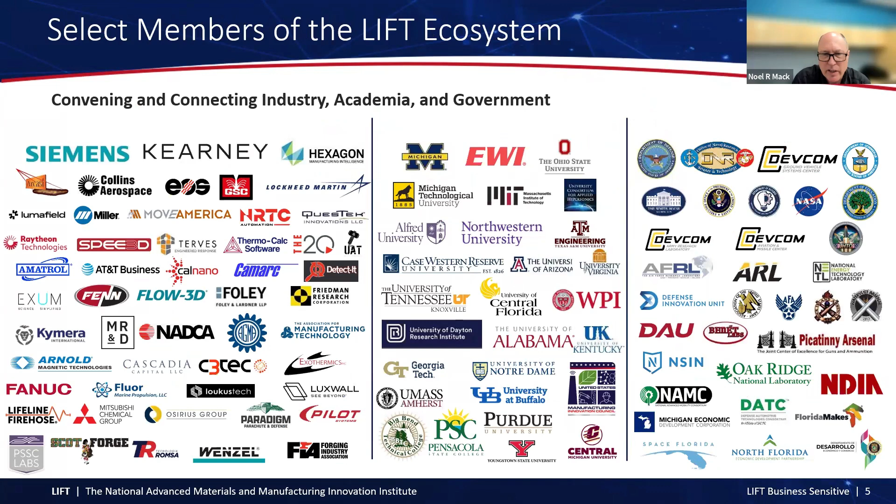So why do we need a National Advanced Materials Manufacturing Innovation Institute? Because literally everything is materials - the room you're in, the car you drove today, everything. It has been studied that an improved materials infrastructure could have a $270 billion positive impact on our US economy. Materials are also of critical importance to the Department of Defense because they not only allow our warfighters to achieve their missions, but better materials can better protect them so they can come back home safely.

Now let's talk about how LIFT is the right organization to work on and solve these materials challenges. As a public-private partnership and accelerator - and it's important that we're an accelerator, not an incubator - we work in this MRL 4 through 7 space. If you look at the manufacturing readiness level space, 1, 2, 3 is really in research and academia, while 8, 9, 10 is mainstream commercial and industrial partners. This gap in the middle, MRL 4 through 7, is often known as the valley of death, connecting good ideas which have legs into commercialization.

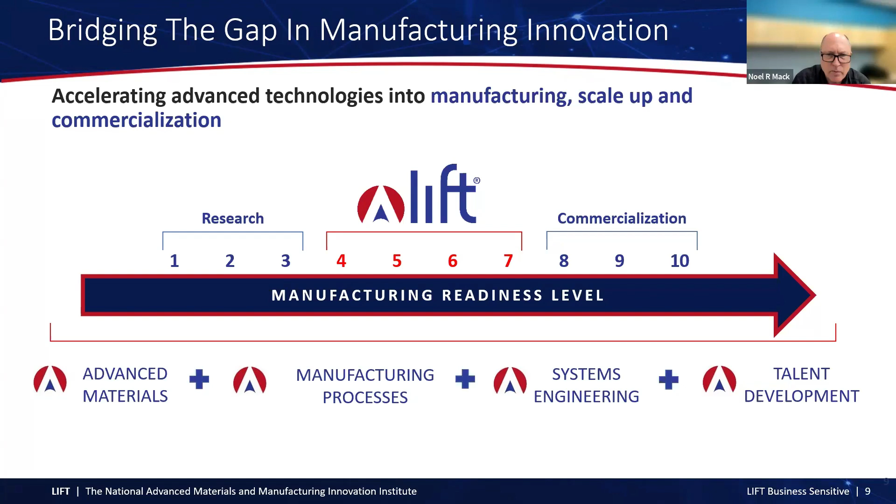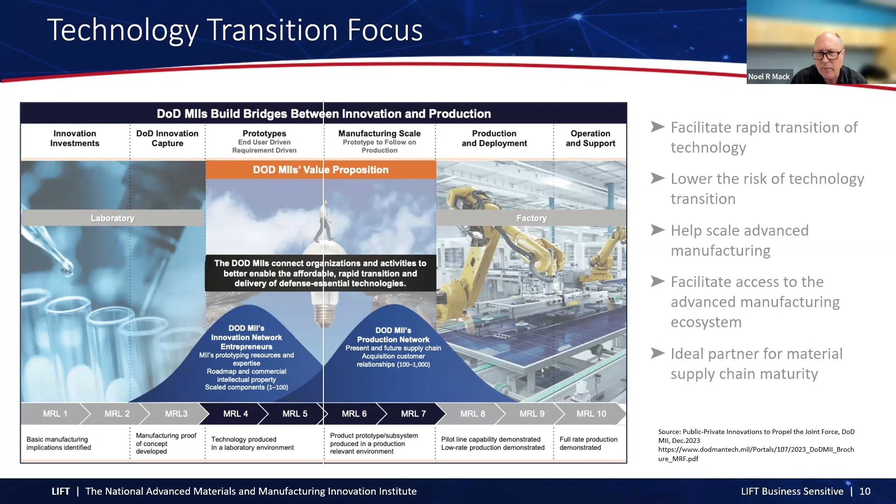As stated in the prior slide, LIFT is the technology accelerator. Thus, we tend to spend our time in this MRL 4 through 7, known as Valley of Death, but we see it differently - we see this as the Sea of Opportunity. This snapshot is the DoD's view of us in those two humps in the middle, from MRL high 3s into early 8s. We work on rapidly transitioning technologies across this space. We lower the risk of technology adoption, scale new advanced materials and manufacturing processes into commercialization. We provide access to an advanced manufacturing sandbox within our facility. This makes us an ideal partner for building a resilient materials supply chain.

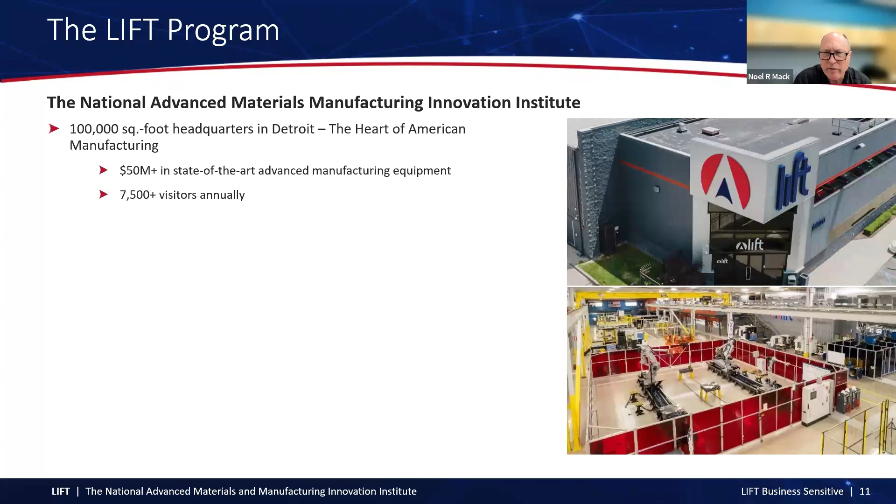As the National Advanced Materials Manufacturing Innovation Institute, we operate a 100,000 square foot facility at our headquarters here in downtown Detroit with over $50 million of manufacturing equipment. This facility sets us apart from other MIIs in that we are not limited to our members' manufacturing capabilities - we stand up our own equipment to study and solve today's materials challenges.

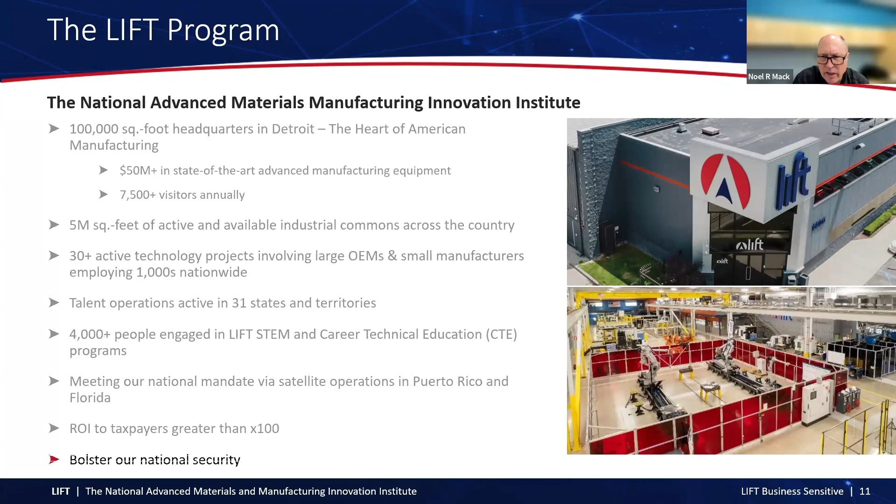We manage and execute roughly 30 tech projects at any given time, involving large OEMs and small manufacturers along the way, and with our government partners. We create and distribute talent development programs to over 30 states nationally, allowing returning servicemen and women to quickly and smoothly re-enter the workforce. And we're growing, expanding operations into Puerto Rico and shortly into Florida. All of this drives a significant ROI back to the taxpayer, but most importantly and proudly, it bolsters our national security.

So we achieve all of this through our technology and talent programs. Our focus today is on a technology program known as Leading Innovations for Tomorrow. This is how we accelerate technologies. There's a rather busy slide, so I'll break it down in the subsequent sections.

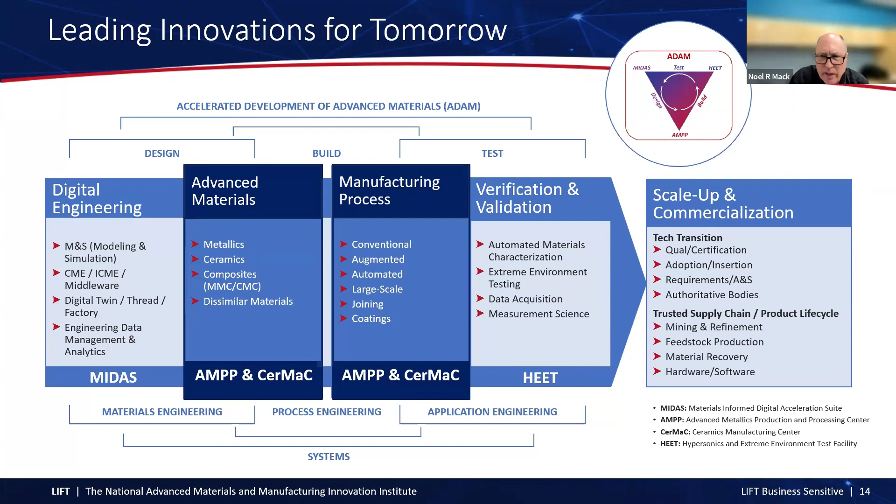These pillars around accelerating technologies start on the left with digital engineering, moving to advanced materials design, coupled with a manufacturing process, to understand that both materials choice and manufacturing process result in a part or system that is fit for purpose. How do we know it's fit for purpose? Through the next pillar, verification and validation, ensuring the digital models, materials choice, and manufacturing processes are correct, and closing the loop with validation. Then we work with our industry partners and the government to scale these technologies up and move towards commercialization.

I'd like to take a few moments to describe our approach to materials development. Material development takes a long time and is costly due to the extensive testing and validation required. We're typically stuck in the build and break model. As a result, new materials are failing to keep pace with more rapid design innovations. Yet new materials hold the key to new and exciting innovations.

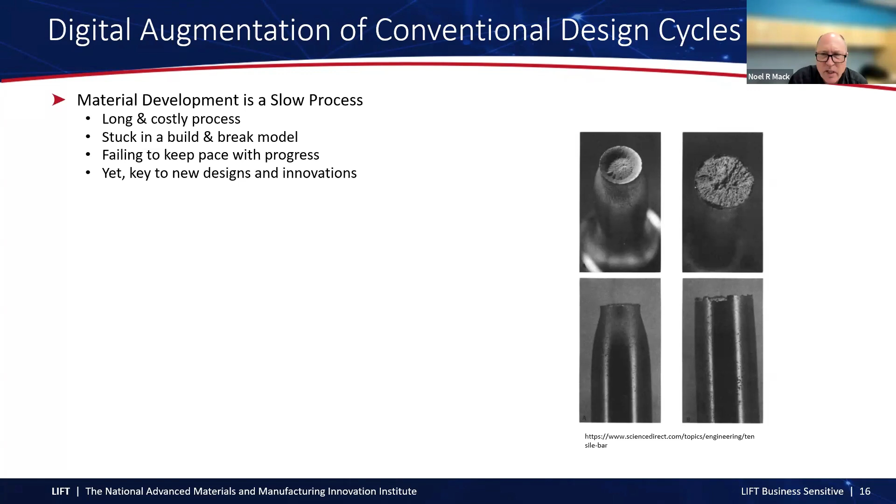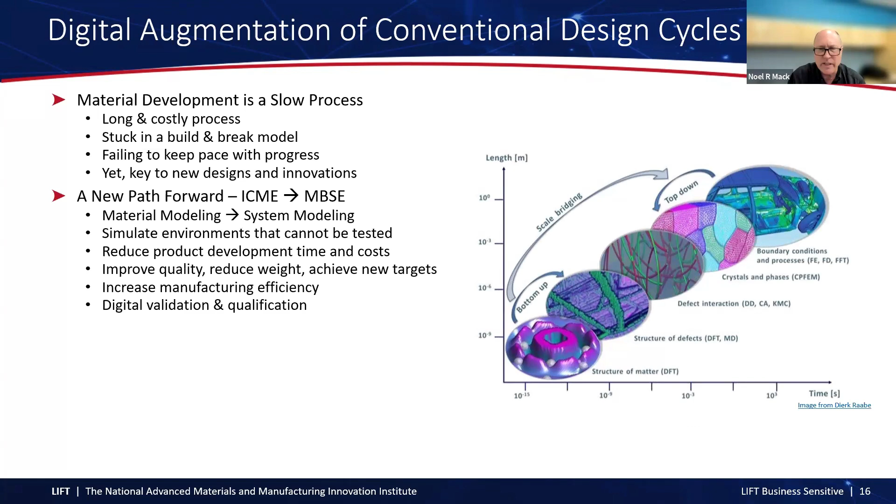There's a path forward: integrating material modeling into systems modeling. This can enable us to break the pattern. Not only can it evaluate environments that cannot be tested, it can also reduce development time and cost, improve quality, and increase manufacturing efficiency. This really yields significant economic and strategic benefit.

By stopping failed programs early and accelerating time to market, we found over 35% acceleration factor. We can increase overall efficiency by over 70%. We can reduce the cost of development and manufacturing, or both. It helps build a robust material supply chain, and the overall economic benefit, we believe, is close to $300 billion annually.

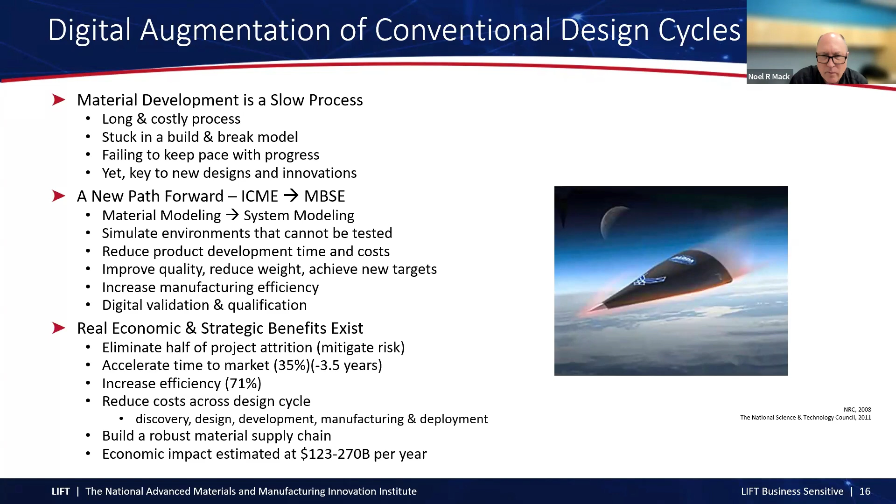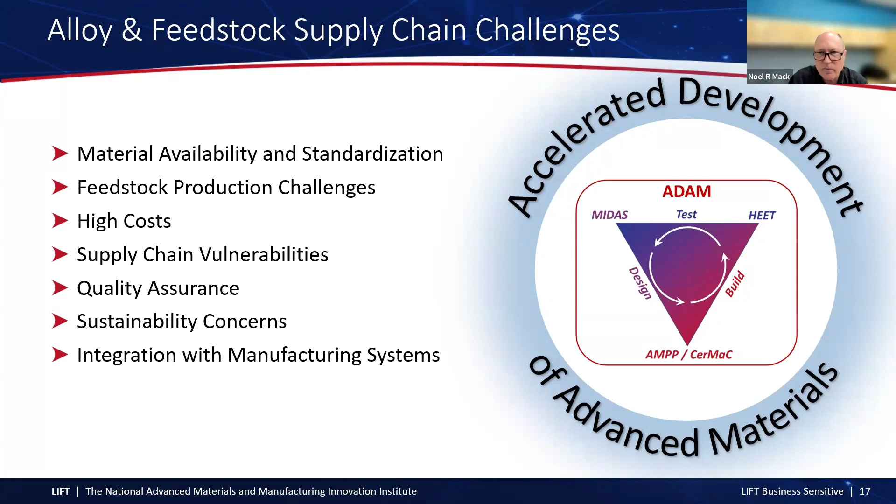As I mentioned, we're strongly focused on material development, particularly in extreme environment applications. We do a lot of independent work in this area to help accelerate the state of the art. We're building out an end-to-end ecosystem to support material development from start to finish. It really rests on three top pillars: design, build, and test. So the objective is to design, build, and test the part, the material, and the process simultaneously. We're very active in digital engineering.

We're also standing up capacity to deliver metal feedstocks to support these new material discoveries, as well as the capability to produce custom ceramics and CMCs. That's the next pillar over. And finally, we're engaged in the development of a new state-of-the-art extreme environment test facility in the state of Michigan. That's the third pillar, our HEET. Again, everything we do is to accelerate technology development so it can move into commercialization.

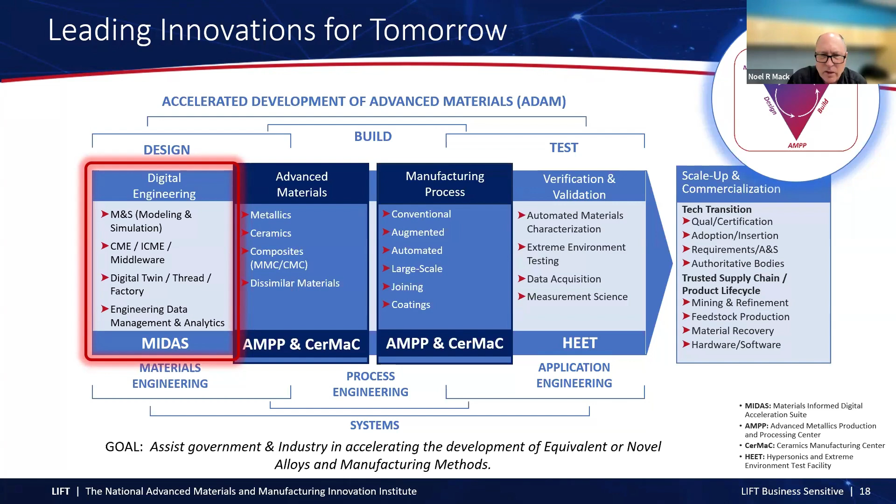So let's talk a bit about what we're doing first in the digital space. I spoke about the significant economic opportunities that await us. What we really need to do here is integrate material modeling with systems modeling. However, there's a bunch of challenges that exist.

Today, we've got discrete silos between materials development, manufacturing processes, and structural applications. In many cases, these are different departments even in most of the companies we work with. As an example, with additive manufacturing, the material and the part being created at the same time are inextricably linked and they influence each other. So it's very difficult to design them in silos.

So by creating this materials-focused, model-based systems engineering approach, we can aggregate knowledge across these silos, really linking the materials and the application together, creating an environment that combines both the digital and the physical.

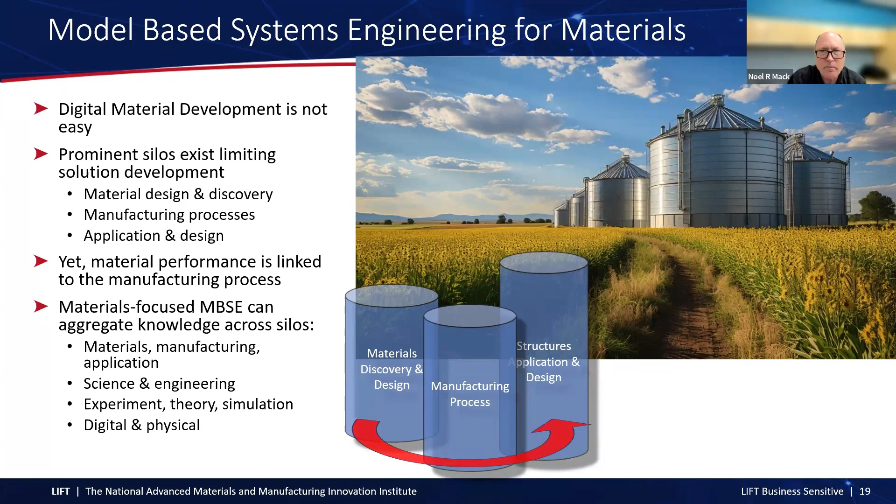So that's a lot to consider. We're talking about linking the atomic to the nano, to the micro, to the macro scale from end to end. Today, there are lots of applications to help you along the way to solve these parts of the process, but there's no singular software in existence that addresses the varied needs of the material community across the full spectrum.

Each does create a digital twin of its respective physical partner. However, there's not much connectivity between these twins. So today, with no common interface linking all these disparate tools, and if there is, oftentimes they don't speak the same language, so spinning the thread still requires manual intervention. Essentially, some codes speak German, some codes speak English, and some might speak Spanish, but we need to do the translation from one to the next. So we're really left with a collection of digital twins and fragments of digital threads that require expert knowledge to navigate and synthesize.

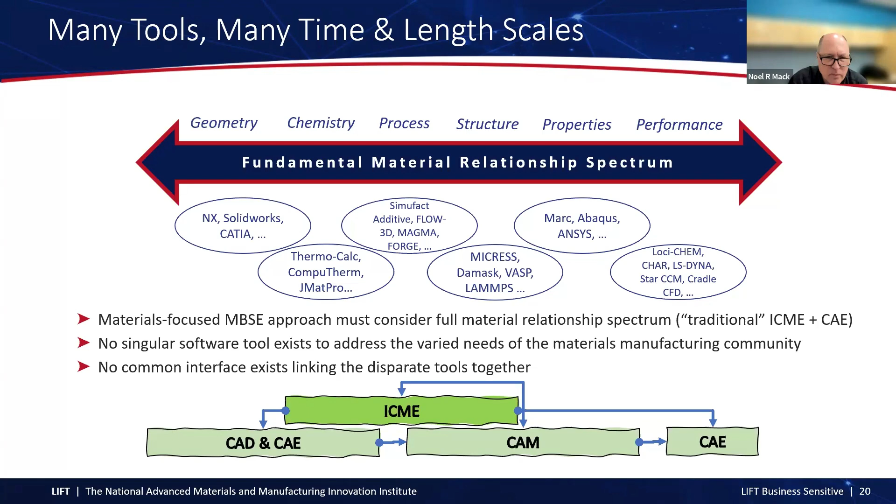So what we know as MIDAS, which is our Materials-Informed Digital Acceleration Suite, is a digital platform that supports both material design and manufacturing process development. It facilitates and automates data translation between the codes, creating a robust digital thread across multiple digital twins. It automates the process, giving rise to accelerated development, and supports a digital validation and qualification strategy.

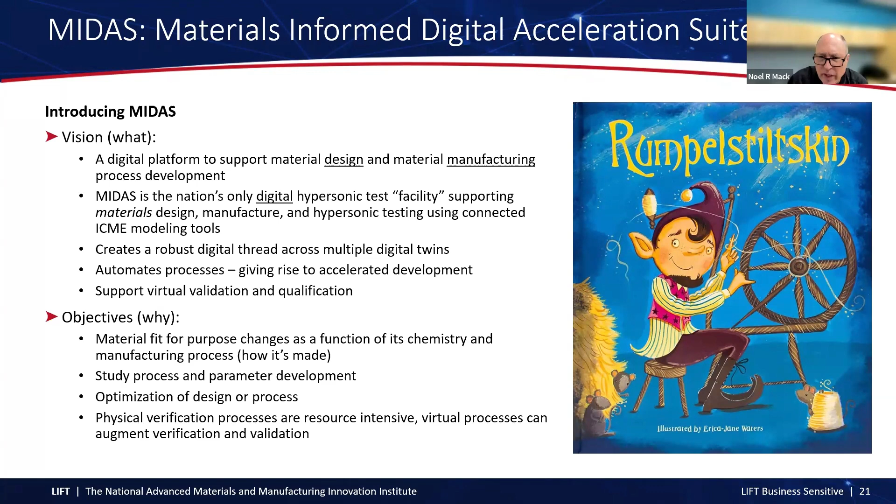So it allows users to understand if the materials are fit for purpose as a function of the chemistry and process. We can study process parameter development and perform optimization of design or process, or both simultaneously, and perform the virtual qualification. You could call us the Rumpelstiltskin of ICME. So we're really spinning the straw into a digital golden thread that connects these disparate systems, allowing one to create tomorrow's next material breakthrough.

So at the same time, once you have a new material, it still requires physical trials and validation. So we also need to accelerate this process. We're currently standing up equipment to manufacture metal additive feedstocks across the full periodic table. We'll then take those materials and, leveraging equipment on our shop floor, produce parts for testing. We're not limiting ourselves to metals only. We are also highly engaged with the next generation ceramics and CMCs and other extreme materials. Similarly, we are not limiting ourselves to additive manufacturing, but supporting a full array of traditional and novel manufacturing methods as well.

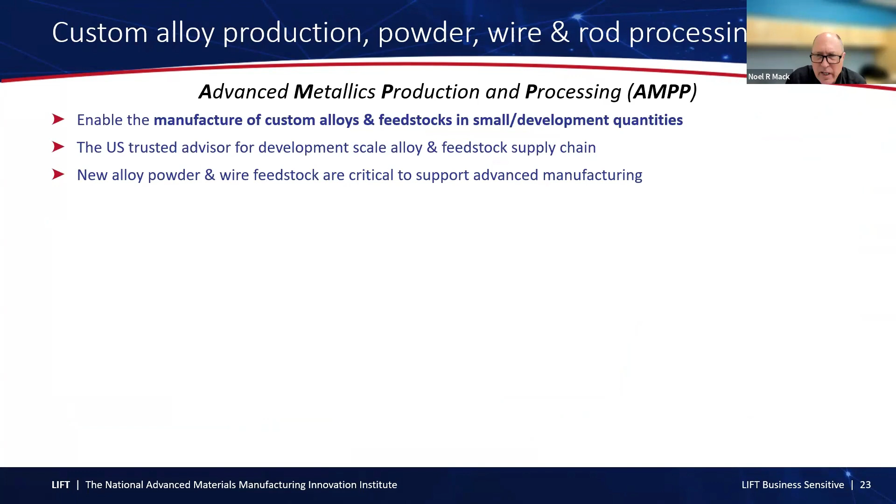So we're focused on technology acceleration. We're focusing on this center and small development scale volumes in novel materials. The Advanced Metallics Production and Processing Center will be capable of producing novel alloys across the periodic table, from steels to refractories, and will support the broadest AM process from powder bed fusion to DED, friction stir, welding, cold spray, and others.

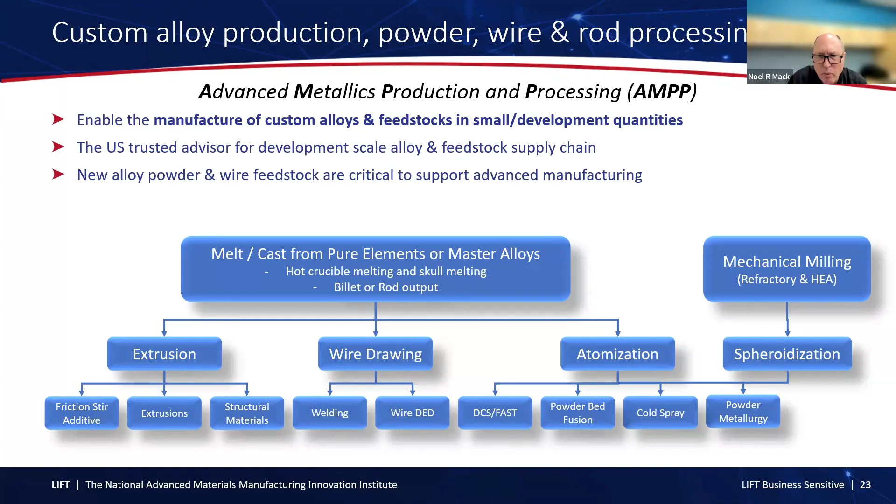We start at the beginning by melting alloys to your specs or designs of our own recipes, and then post-process these materials to deliver high-quality feedstocks in powder, wire, and rod form. This should support the broadest of AM processes.

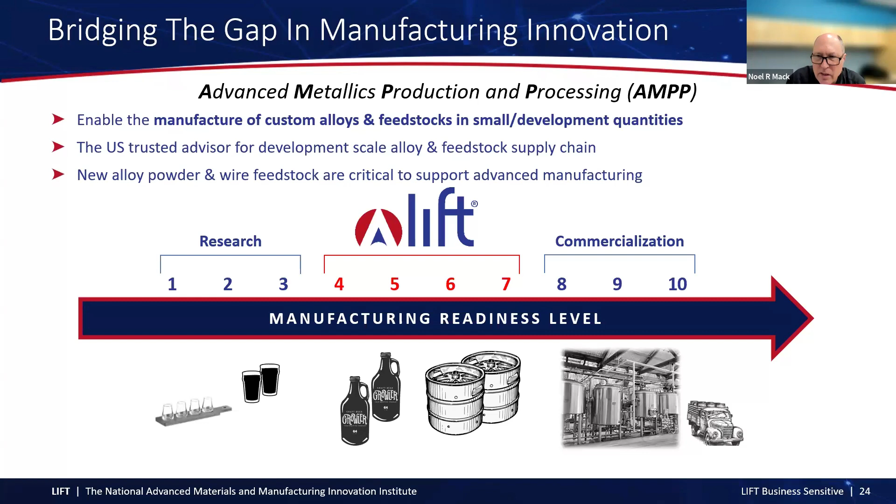So, putting this in a different context, put this into a brewing context. Academia, research organizations working on flights and pint-sized batches. We're in the growler and keg quantity, and then industries producing truckloads. This capability fills the void between the two quite capable existing bookends and helps speed development of novel materials.

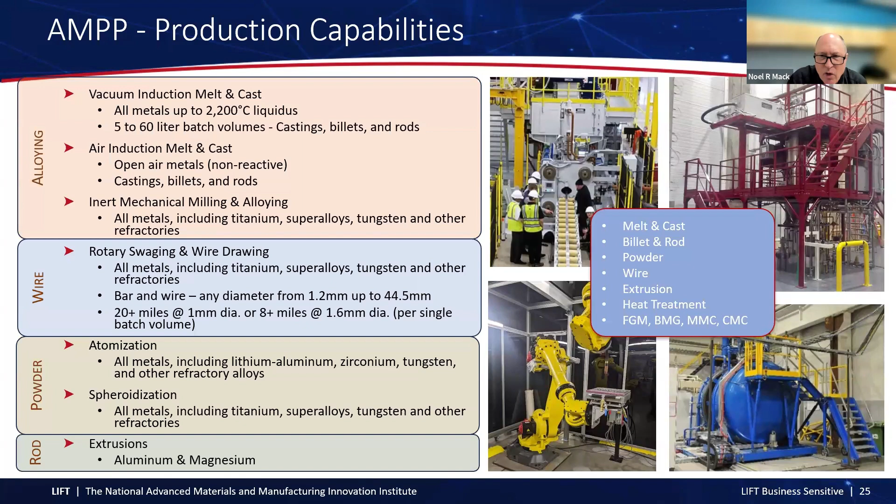So a couple of words on each of these capabilities. Some of the specs on the melt cast capability. So this really goes from the reactives, the aluminums, titaniums, and zirconiums through the light elements, aluminums and magnesiums, through to the ferrous and other materials. We can run in two separate modes, either a hybrid hot crucible or an induction cold crucible mode with roughly 28 to 30 liter batches. We clearly talk about the volume because if we're working in the lights and the brights up to some of the heavier materials, it's more important that we focus on the volume than the mass. But think of 500 pounds of steel is a typical batch size through this capability.

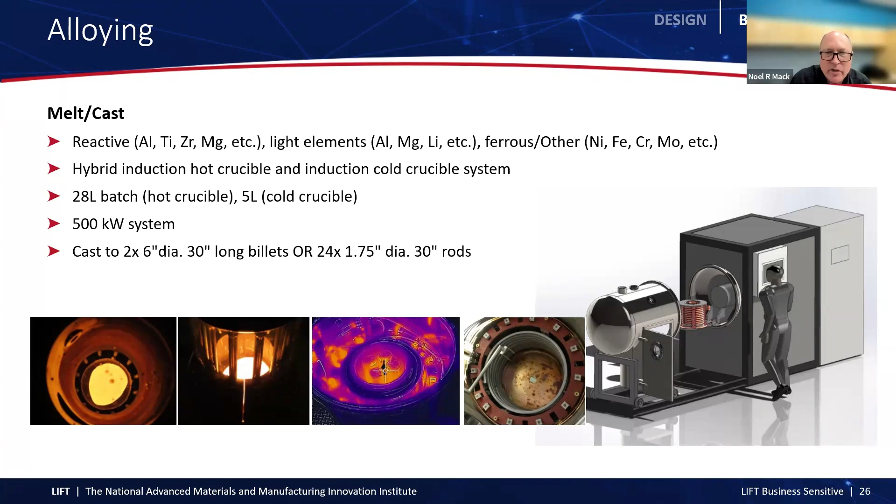On the attritor, here we're really intending this for the refractories that we can't put through the traditional alloying process. This is really crushing the particles together. Think of two different colored Play-Dohs and constantly melding them until they become one.

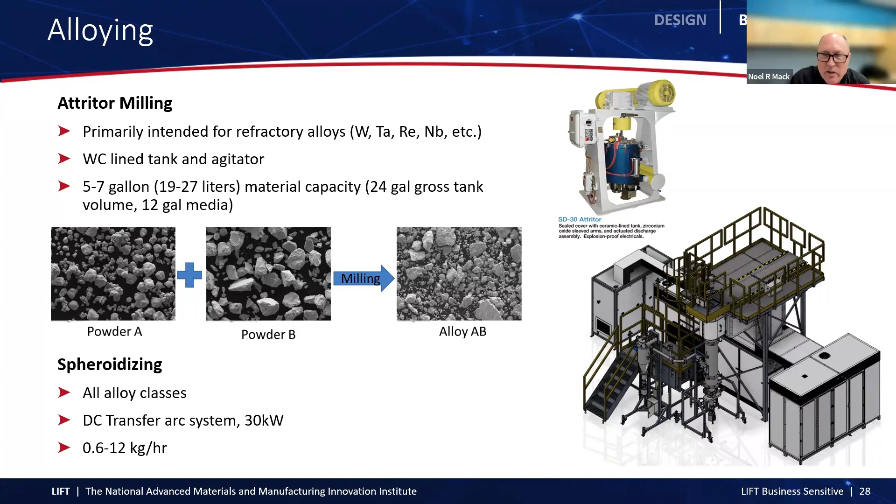Here, the particles that come out look more like cornflakes and need to be, in most cases, spheroidic in nature to flow through downstream processes. So in this case, we'll feed them through the spheroidizer to get spheroidic particles.

On the atomizing side, it can be run in multiple modes, roughly 90 liter capacity for the screw feed or 60 odd for the tube feed. We can also run an induction hot wall crucible for a close-coupled operation, which is for non-reactive materials.

This equipment that you see in the picture stands roughly 26 foot high, so it pretty much fills the high bay to the ceiling.

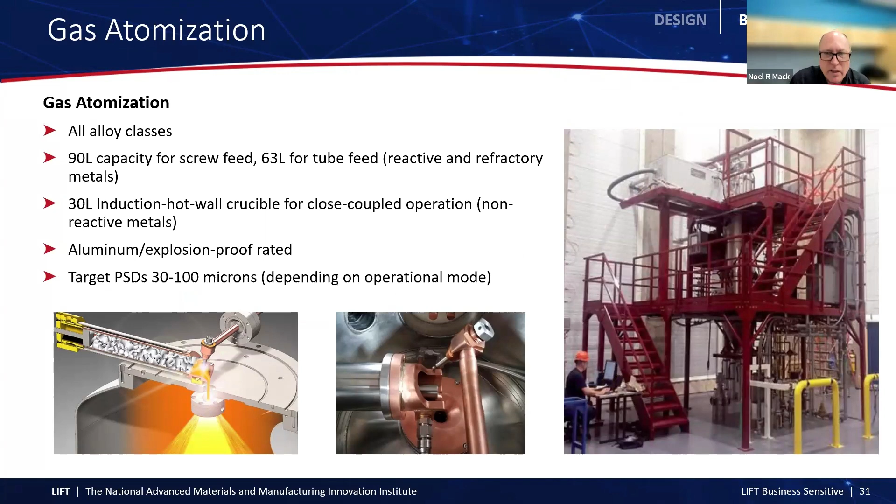On the swaging and wire drawing, we typically start with a roughly 45 millimeter diameter rod. We'll swage that down to roughly 1/2 inch and then run that through traditional bull blocks to as small as 0.6 millimeter diameter wires.

If we think of one rod that has been cast, and we can cast up to 24 rods at a time, one rod that is cast, if we draw that down to say 0.6 millimeter, that represents about a mile of wire. So through this capability, we can produce roughly 24 miles of wire from one batch through the melt cast process.

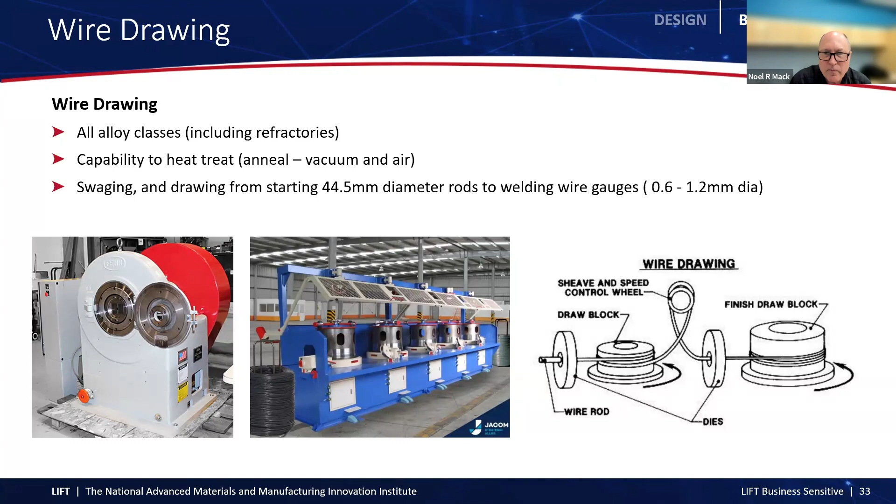Then, of course, to further evaluate these materials, we need to, in most cases, produce a part for testing. And here we have a host of other equipment in place, whether it's AM or traditional manufacturing. We've got equipment on hand to manufacture and then test.

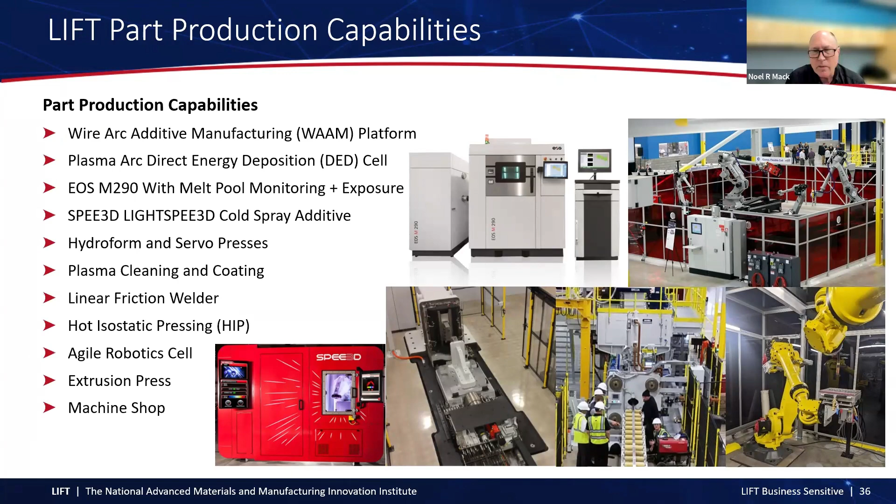Some cool recent additions. Two of the most recent additions to our high bay: first, DCS or FAST or SPS, depending on where you live in the world. Direct current sintering is the most common term we use inside our organization. Some people call it field-assisted sintering technology, spark plasma sintering.

Either way, this equipment is stood up, and here we're running at roughly 250 tons and just on 1,000 amps of current that we pass through this to get to a max operating temperature of about 2,500 C. On the right is a more recent add, which is our plasma arc weld DED cell that we've stood up.

This can run up to 8 wires simultaneously to either alloy on the fly or produce functionally graded structures. We can run this in an 8-wire, 4-wire, or 2-wire mode and put down materials at up to almost 60 pounds per hour with a hot wire insert on the 2-wire feed.

We can also run this with shielded gas or with a fully inert environment. We literally flood the entire cell, purging it from the bottom up with argon, so we can run in a full inert environment if we need to.

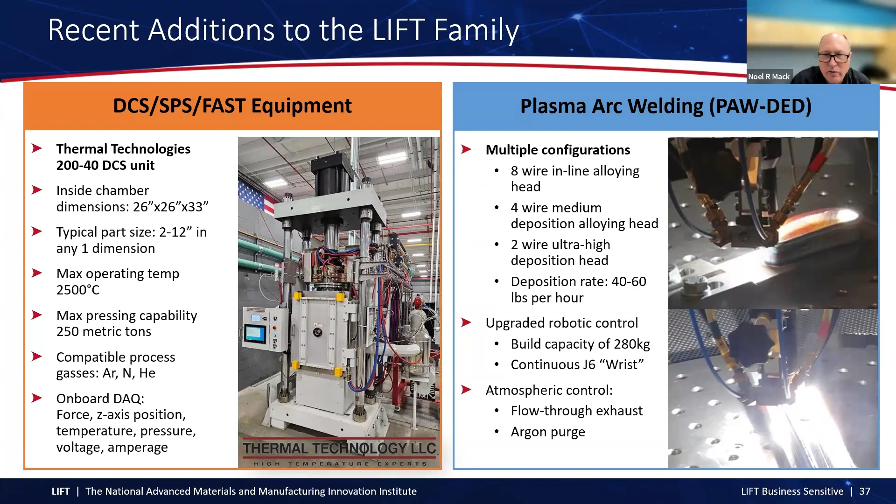And if we're making alloys and the respective parts, we need to be able to test. So speaking of testing, we've got a comprehensive materials lab to ensure the final output meets the specs requested. This ranges from traditional structural performance down to atomic level and powder chemical analyses.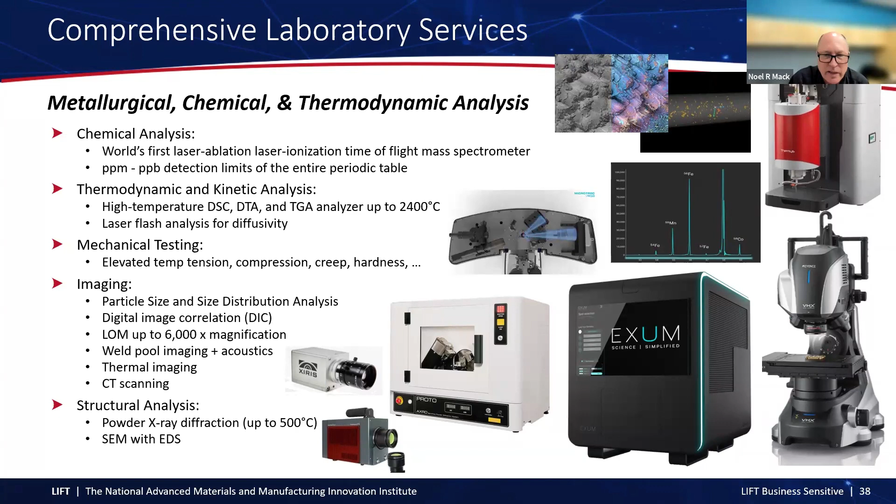To enhance our nation's capability and complete this digital thread, we're putting in a new hypersonic and extreme environment test facility as well. This will also be installed in Michigan. This links the three capabilities together: design, build, and test, allowing us to complete the digital thread from start to finish to greatly accelerate the next generation material development.

The jewel of the test facility is the hypersonic tunnel. This will get up to speeds of roughly Mach 8, stagnation pressures around 2500 psi, and temperatures in the 4000 Kelvin range. It'll be well positioned as one of the highest performing tunnels in the US for materials testing.

It'll have an operating test area of roughly 9 by 9, 9 inch by 9 inch exposed area, which positions it well for material development. It also has the ability to perform high strain rate and shock testing in the same facility. This will be done with split Hopkinson bar, Taylor and planar impact testing, along with a light gas gun, which gets us to speeds of roughly Mach 23.

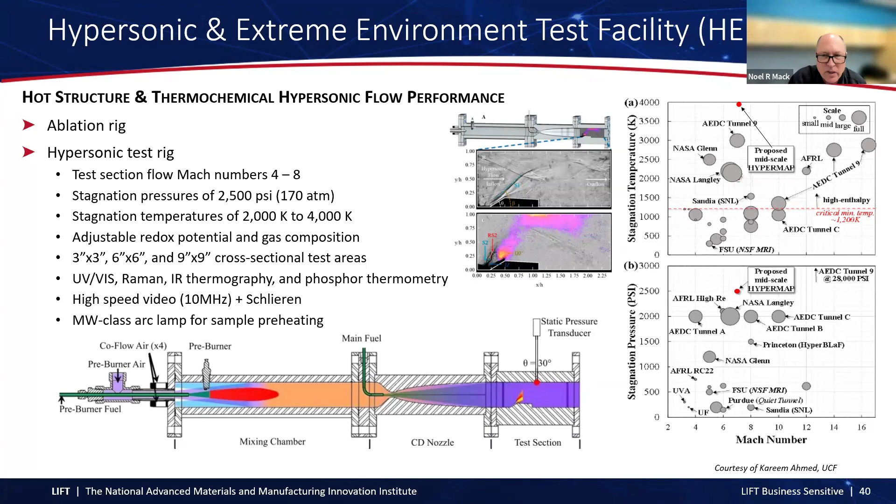Now, the planning of this facility is well underway, and the first equipment will be procured through this year, and commissioning is just around the corner.

So, together with that, we obviously need the capabilities to do traditional materials testing: tensile, fatigue, fracture toughness, and the ability to perform these tests at elevated temperatures, as well as unique testing for ablation and oxidation studies, which is common in most extreme environment cases.

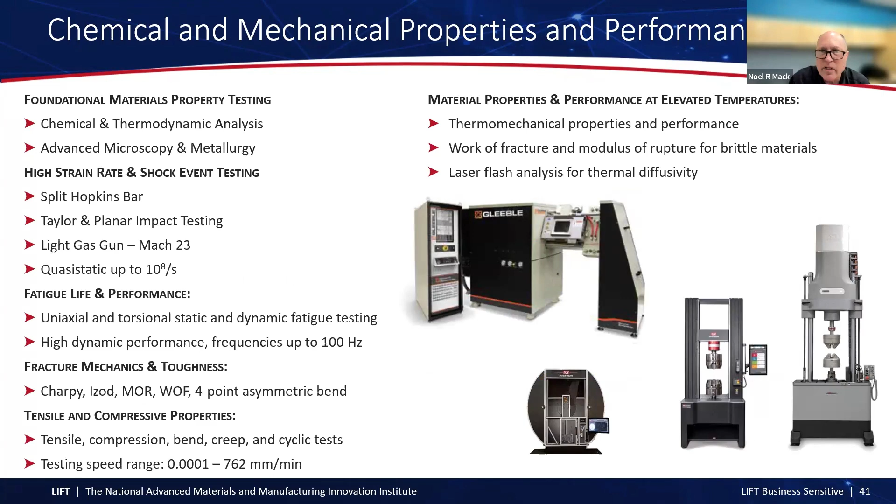So, unless there are questions, I'll switch over to a few examples of how this framework has been exercised in several of our past projects.

First example being the experimentally coupled hypersonic digital twin to scale materials. Here we've developed a unique alloy in the digital space, including the consideration of its performance attributes in a hypersonic environment. We've tested it in the appropriate environment to confirm and correlate with the digital model.

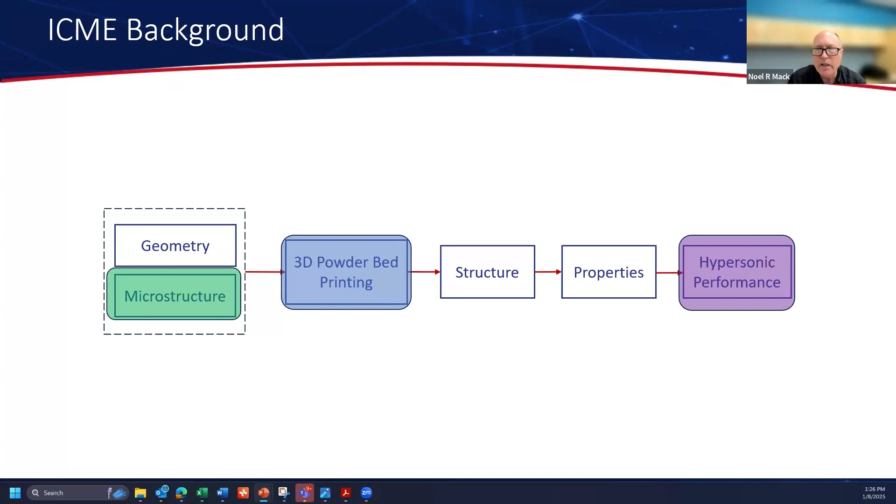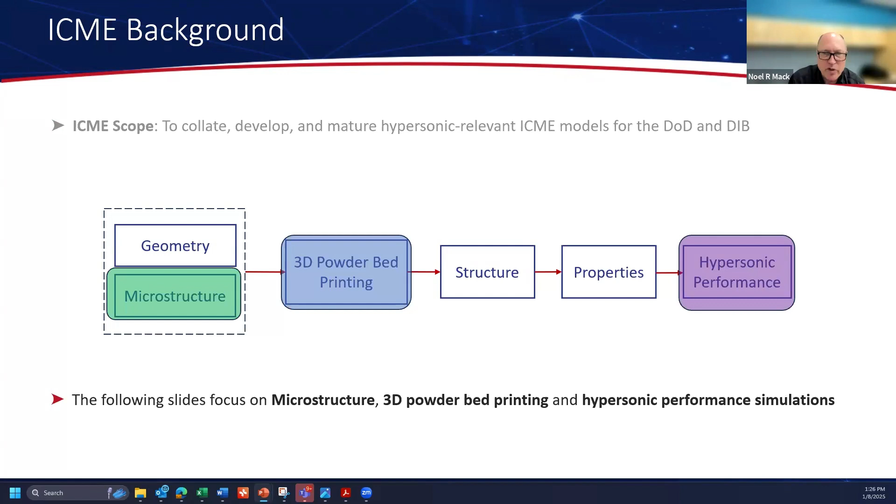So in the ICME space, starting with the digital, starting in the ICME, here we've looked to collate, develop, and mature the hypersonic relevant ICME models. We've modeled across the continuum, from geometry and microstructure through the process, capturing the properties and then predicting the performance. But in this case, I'm going to look at just the microstructure, 3D powder bed printing, and hypersonic performance simulations.

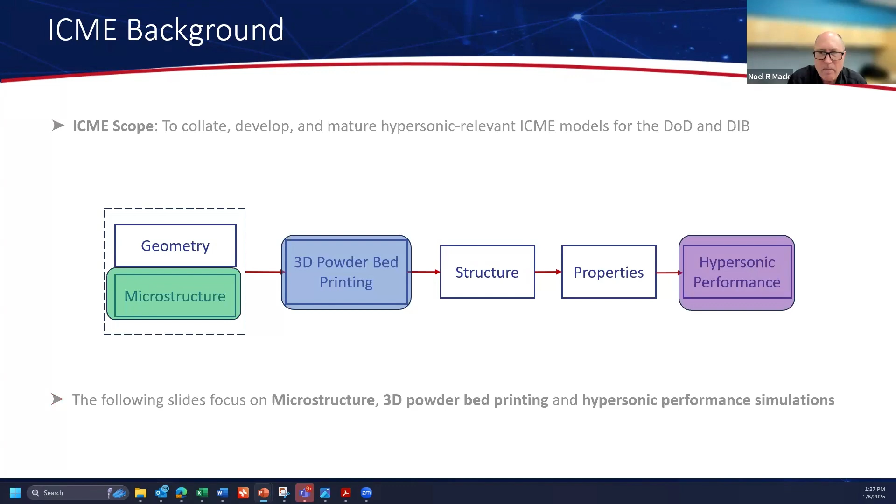Here you see the predicted microstructure evolution from the laser beam powder bed fusion process, as well as the evolution from the heat treatment history. Starting with the microstructure of the actual laser beam powder bed fusion process, and then running that through the simulation of the heat treat process. The objective here is to identify the presence, or hopefully lack, of deleterious phases, and also to observe the grain growth. In this case, we use the phase field code to do the simulation.

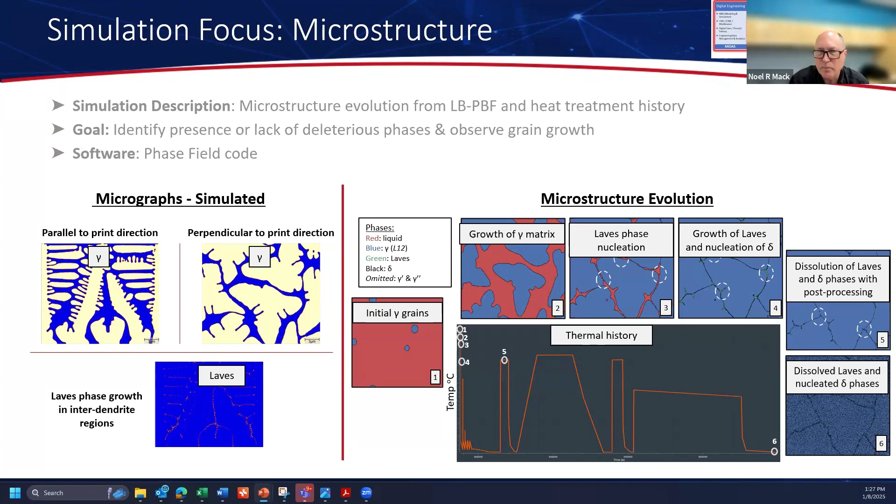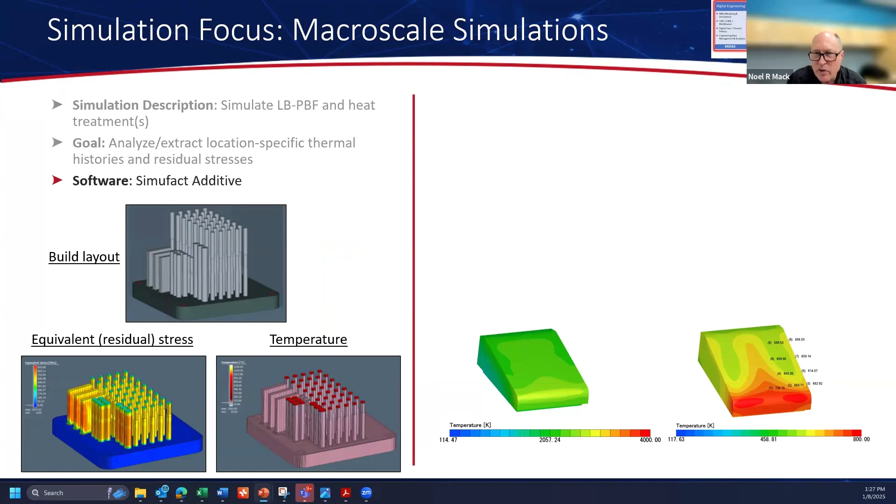Here's an example of the macroscale output, where we've extracted the location-specific thermal histories and residual stresses. And then finally, on the right, we've simulated the hypersonic performance of these wall-mounted wedges. You'll see two distinctly different simulation results at the bottom.

Both are from popular mainstream software codes. The first one I've redacted the name of, which is a density-based code. It's been extended for hypersonic speeds, specifically to account for non-equilibrium thermodynamics, and this is using an arbitrary Euler-Lagrange solver. The second software used for the same simulation happens to be Cradle CFD, also a density-based solver, and also an ALE solver. In subsequent slides, I'll show the importance of these two softwares and the interpretation of the results.

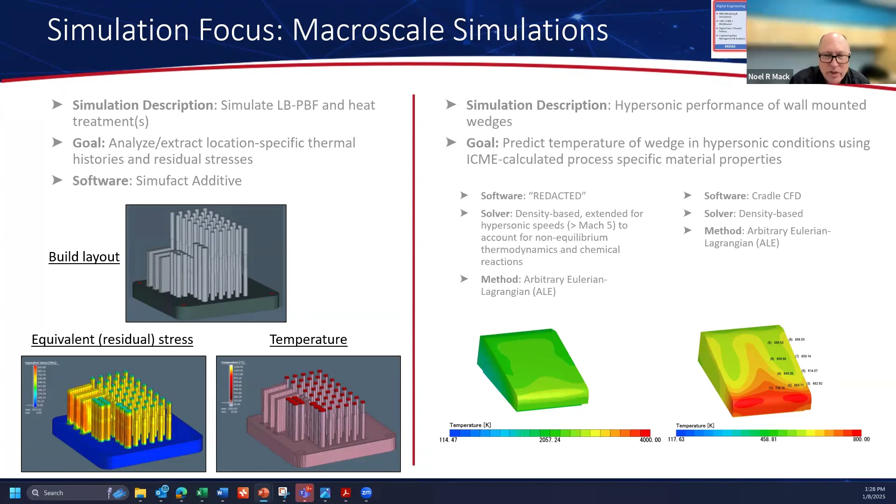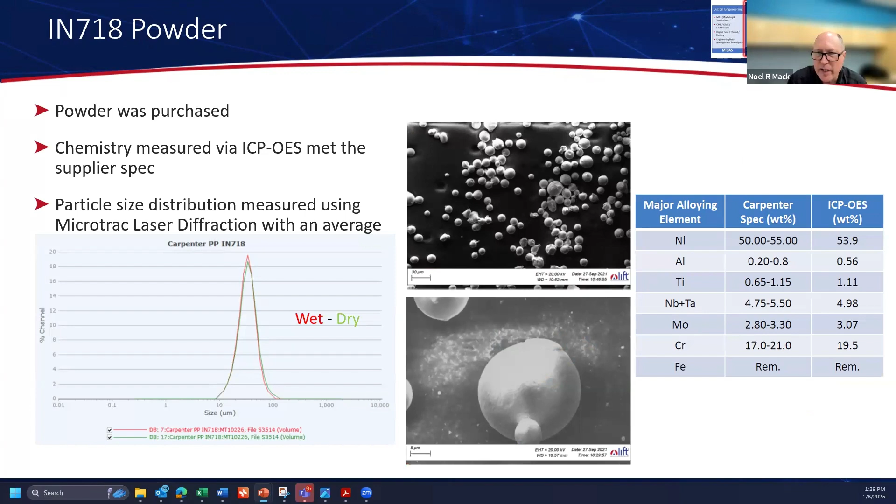In this case, we actually purchased powder for this project because our capability was not yet commissioned. First off, we evaluated the chemistry and the particle shape and size to ensure we had correlation with our simulation. We manufactured the test coupons with our EOS M290.

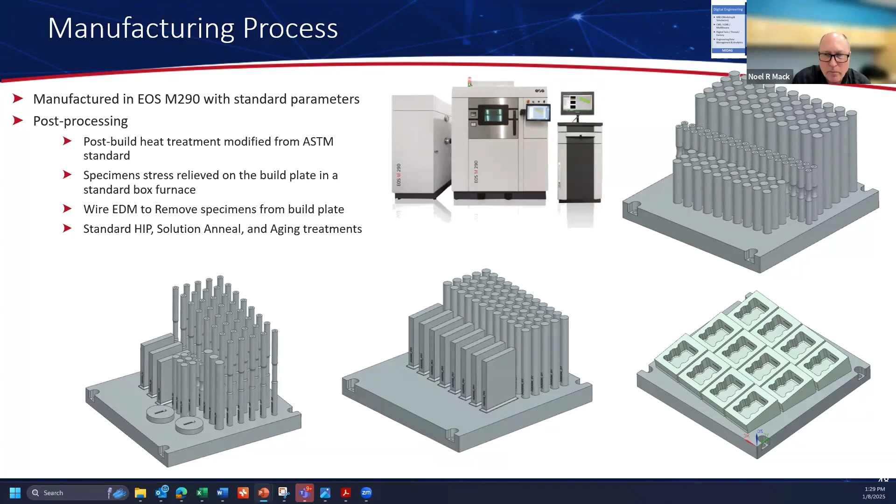Here's pictures at the bottom of the actual build plates as they've been built. You can see in this case the geometries were not that exciting, being test coupons and wedges. We've done the post-build heat treatment with a modified ASTM standard, stress relieved the parts, and then removed them from the build plate using our wire EDM. So we've then taken these samples and done the V&V.

This is valuable feedback, though, that we can now provide to the software companies. As you can imagine, most software companies don't have the luxury of elaborate materials test capabilities, especially in hypersonic environments, and also don't have access to results needed to fine-tune these codes. So this, we believe, is a unique value that we can bring to our software partners in our ecosystem.

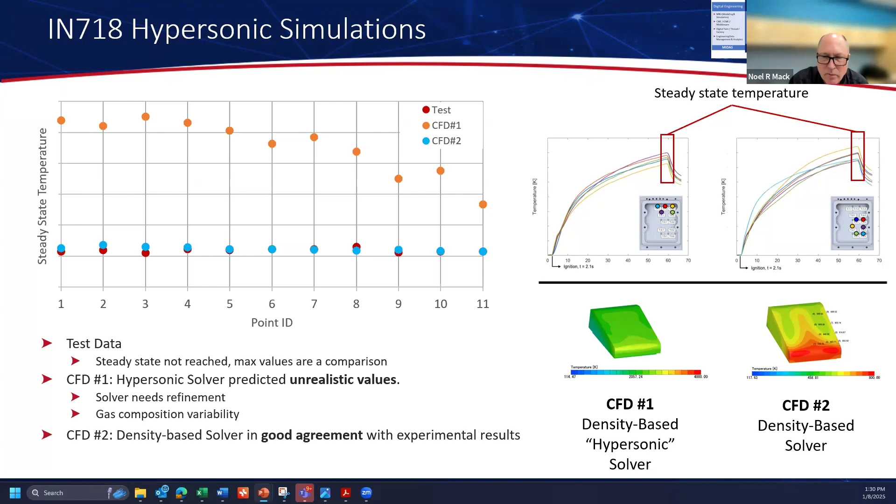Some of the graphs from the post-test are evaluated, and then we look at location-specific areas which we zoom into to actually understand what has happened, looking at precipitate phases through our SEM with EDS.

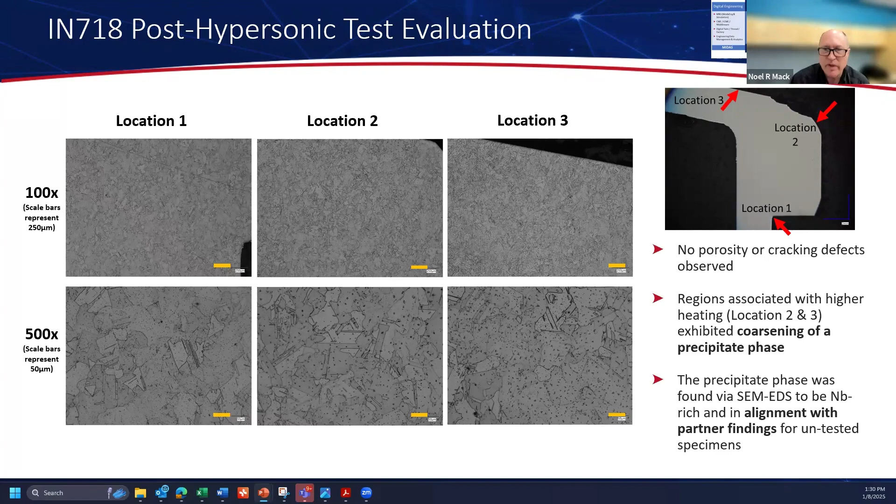Scaling this up, part of the commercialization of this capability, we're now standing up what we know as our HEET capability. HEET stands for our Hypersonic and Extreme Environmental Test facility. Once this is done, we'll not only have the experimentally coupled hypersonic digital twin to scale material solutions, but we'll also have the entire capability from the digital, the CAD and chemistry, through the material production and processing feedstock, as well as the part build, all under one roof. So everything from soup to nuts will finally be in one house, which we believe really helps to accelerate the process.

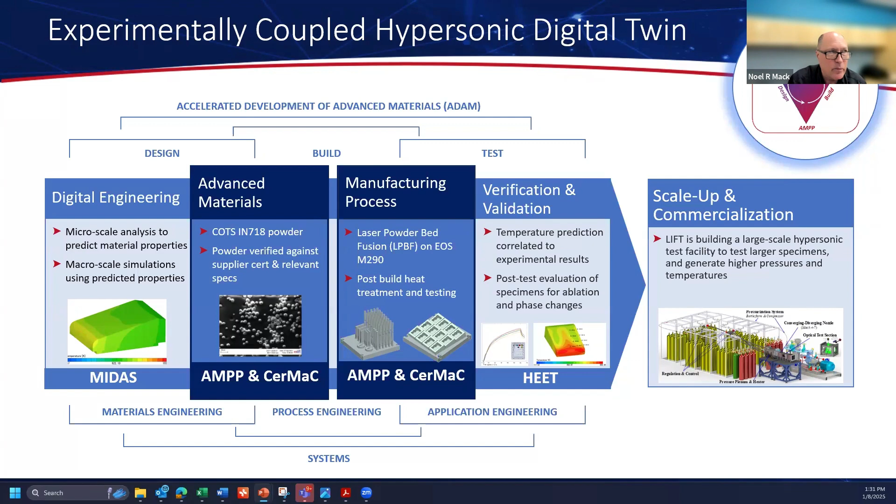So this is how the respective swim lanes of effort align with our tech pillars and build out on these differentiating capabilities.

The second example I'm going to look at is from a program we knew as the Materials Characterization for Additive Manufacturing using ICME. In this case, the ICME scope is to develop models with an emphasis on characterization of metallic materials used in additive 3D powder bed printing, as well as additive manufacturing using traditional gas metal arc welding, or MIG.

Here, the focus of the next couple of slides is really going to be on the gas metal additive manufacturing side, and not so much on the powder bed printing, because that was covered in the prior program.

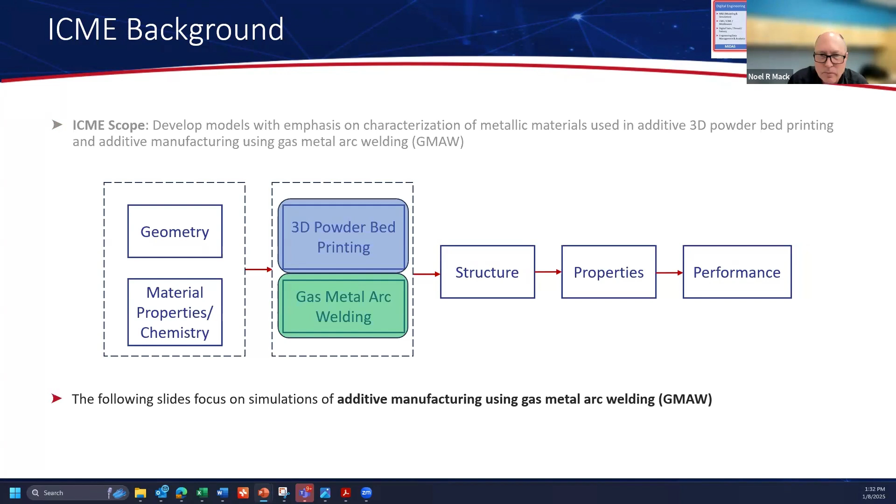In this case, our simulation focus is really on dilution modeling. Unfortunately, again, most of what we're looking at are not very exciting parts. We start typically with a single track. In this case, it was nickel deposited on a steel plate, looking at measuring things like dilution. The objective here was to determine the extent of the material mixing and the dilution. In this case, we use ThermoCalc, and then on the CFD side, Flow-3D as the CFD code.

Here at the bottom graphics, you can see the weld beads as they are simulated, as well as some of the thermophysical properties on the right-hand side.

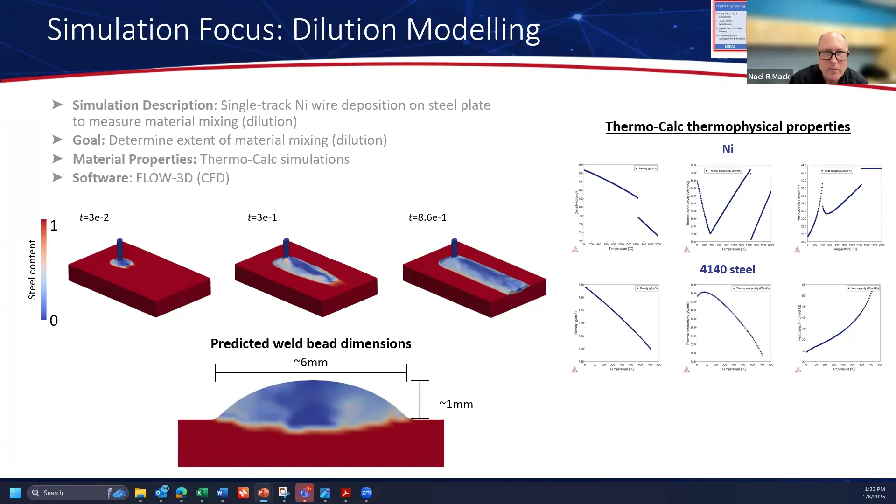So the second focus is on weld strategy. Here we're looking at simulating different weld strategies. Clearly you can weld these bands by going round and round, or you can weld them in a zigzag stitch pattern. The objective here is to predict and compare thermal histories

of the respective weld strategies, not just the thermal history of the bead we're laying down, but also the substrate, to ensure that we understand whether there's any propensity to crack through the heating and cooling cycles. In those two small graphics, you can see the animation of the simulation of those weld beads being put down in these respective models.

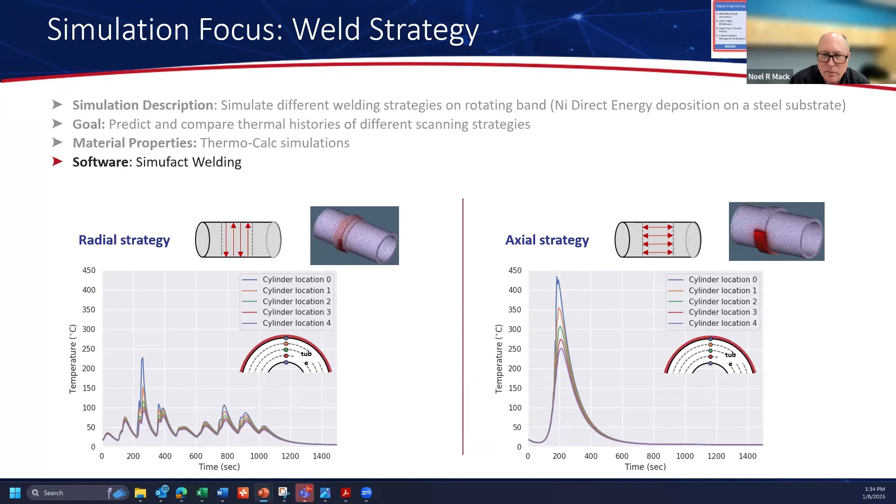So we then put this into the physical, and here you can see a snapshot of the inside of the cell that this was built on, the top right graphic. Here we put down 1, 2, or 3 layers of nickel welds on this 4140 steel plate. We've got thermocouples on either side of the weld beads so we can understand the thermals.

We also have a cooling channel underneath so we can control the cooling, and we like to cool below the steel martensite temperature between the successive beads, so we actually put a delay in the weld strategy. We run the metallography to evaluate the bead morphology and penetration, and then look at the microstructure and property changes to the steel substrate as well as the beads that we put down.

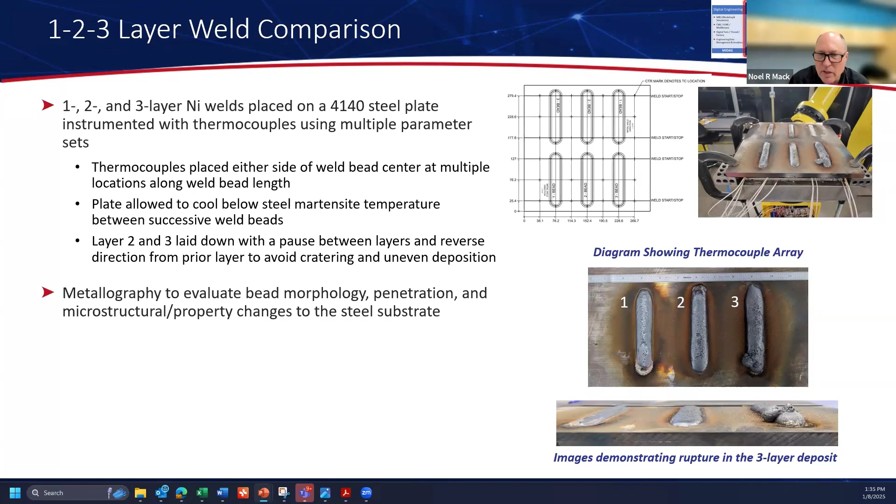So here we're looking at a large format gravity-aligned metal system. If you look at this graphic on the bottom right, this is a snapshot of the hybrid manufacturing WAAM, our wire-arc additive cell. I'll talk in a few slides' time about how this morphed from a MIG-based cell into a plasma arc cell, but I'll hold that for a couple of moments.

This particular cell in this program was built on a Fronius CMT TPS 4000 with Fronius arc monitoring. We used 2 Fanuc 6-axis robots, weld arc vision with dual wavelength and high-speed thermographic acquisition, so we can watch what's going on in the cell real time and then compare that back with the simulation.

So we ran an extensive design of experiments to do the probabilistic modeling of all the input parameters, and then looked for candidate parameter sets to do subsequent builds. Obviously, all the in situ and post-build data is compared with the ICME models and then correlated, and in cases fine-tuned, to more closely represent reality.

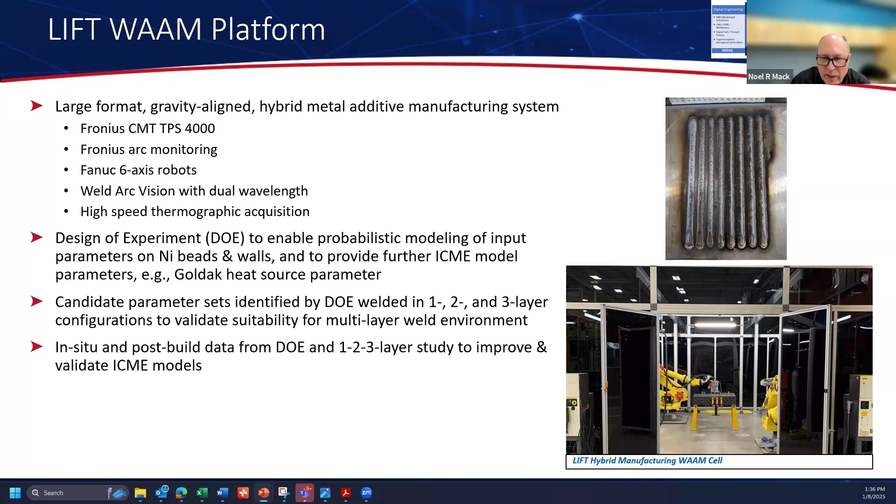So here's some of the reality. If we look at some of the discrepancies between the predicted weld beads and the measured weld beads, in most cases the simulated beads are smaller. So we're looking to understand those so we can feed that information back to the software companies to improve the software capabilities and give them opportunities to build high fidelity models for future usage.

In the bottom, we've got cases where the model capabilities are not available. So we're feeding back information that can be used to build those out.

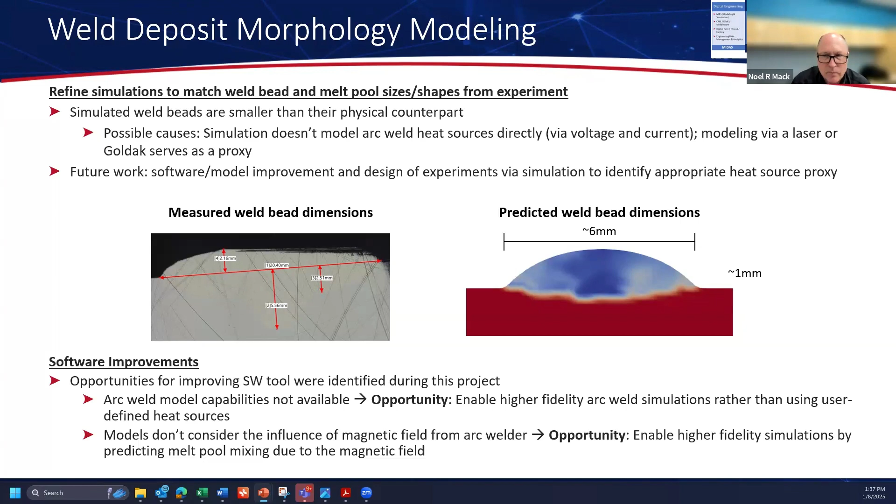So here we're looking at test results again versus simulations, test results as well as literature. It's not as well studied in literature as we'd hoped. You can see the 3 different literature curves, the purple curve which is the simulation curve, and then some of the test results in the respective colors.

If we look at the graphic at the top left, that's a top view of the build block. If you look at the top right of the screen, you can see the block that we've built. So we built out that block with a continuous welding process, and then excised samples in the longitudinal, transverse, and diagonal of that block, and put those through the respective tensile and other property testings.

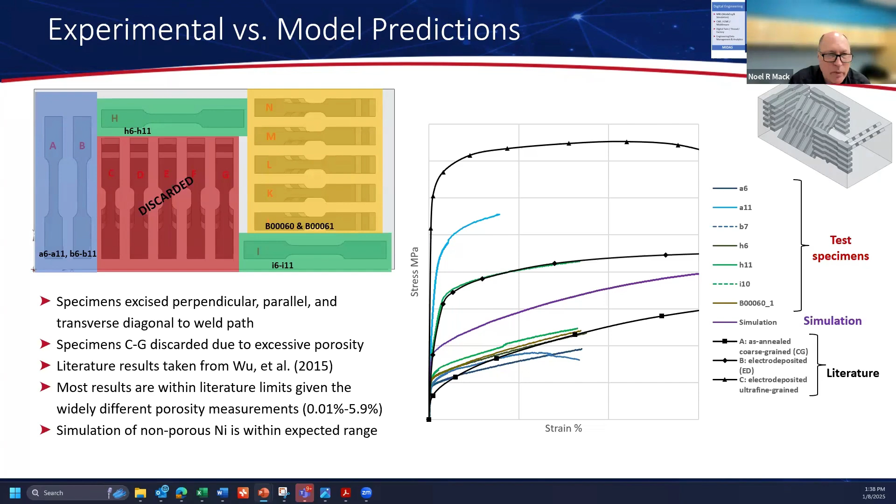So this is where we learned about some of the shortcomings of MIG and have now upgraded the cell to a plasma arc weld cell.

And you can imagine with a 12-axis system, as well as up to 8 wires being fed and the control of the plasma, there's some extensive programming that goes on behind the scenes to make all of this happen.

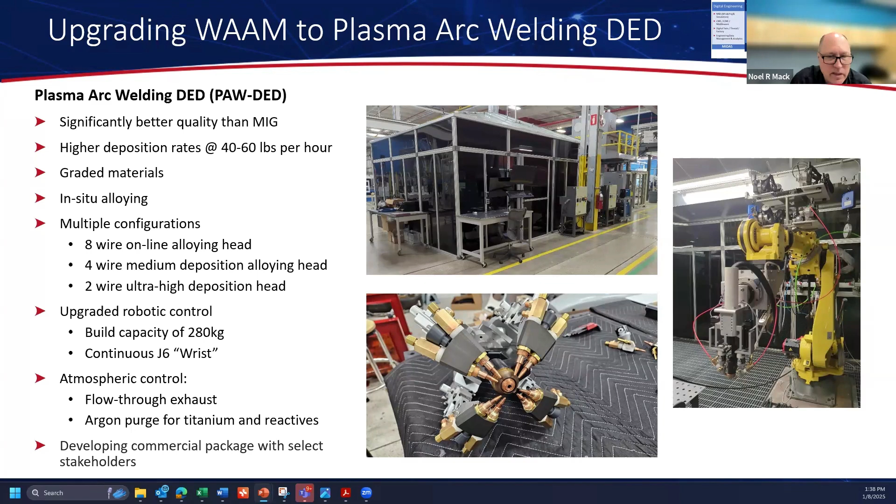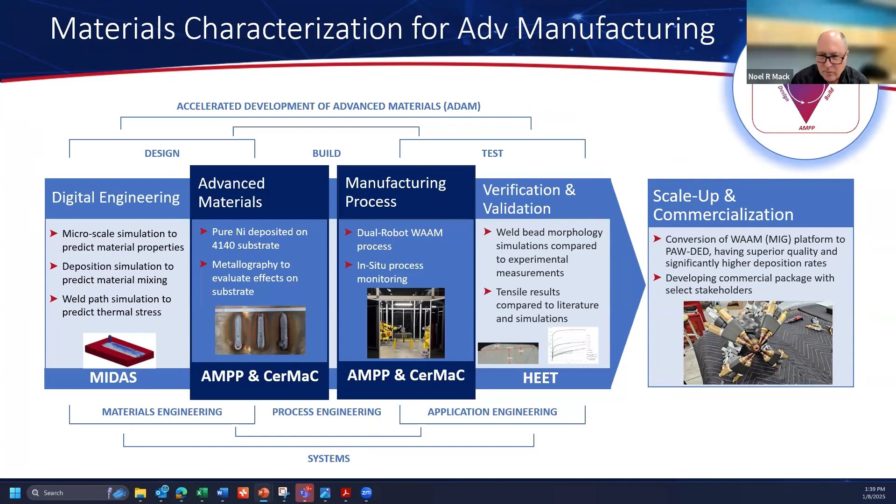So again, as we put this program and the respective swim lanes across the tech pillars, this is how it lines up from the digital through the materials, studying the manufacturing processes, the verification, the validation, and then the opportunities to scale up and commercialize.

The last program I'm going to look at is something slightly different. In this case, we're actually looking at standing up a pilot line to build what we know as electrochemical separator plates. This pilot line will run at pilot rates of roughly 15,000 units annually, and that pilot production should kick off in May of this year.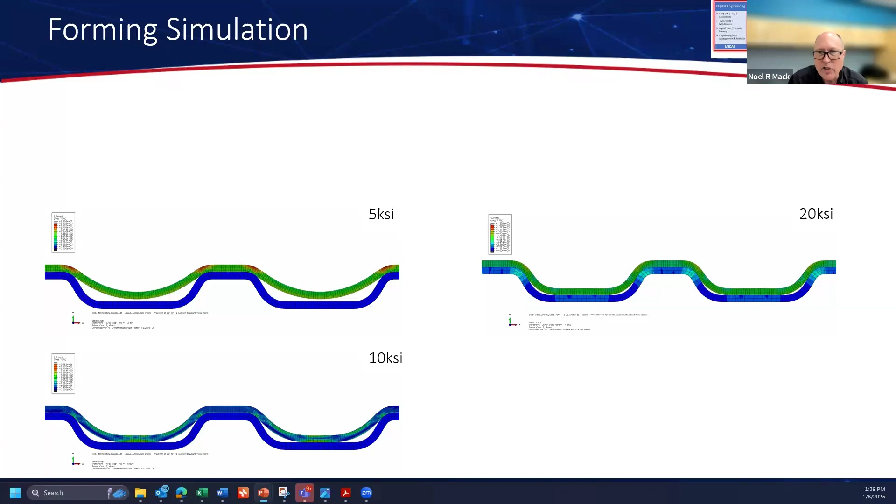So again, starting the simulation. From the simulation perspective, we're looking at the hydroforming simulations of the rubber bladder to form these foils, determining the pressures we need to fill the tool with the foil to form the plates. In this case, using a steel blank with a rubber bladder and a pressure load, the die is simulated as a rigid body, and we're using Abaqus. We obviously need the capacity to fill the void, and we found we need roughly 20 KSI in the hydroforming system to fill the tool.

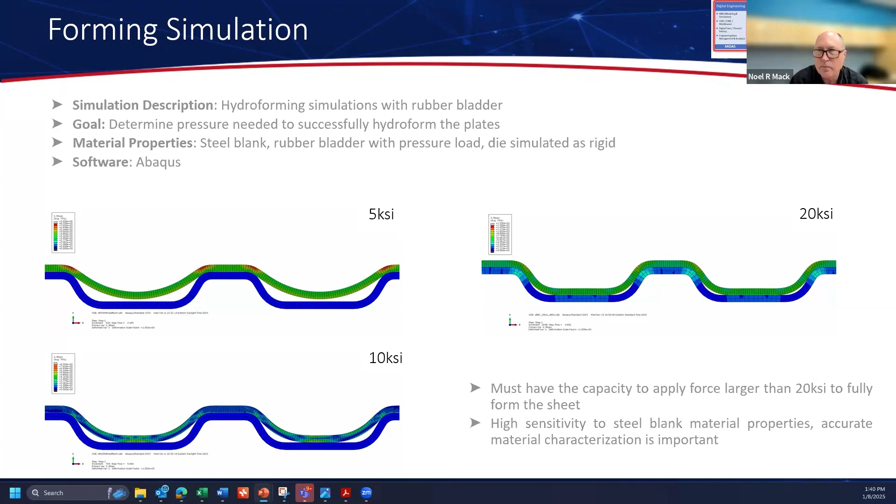So here's putting it into reality, taking this graphitically coated 316 material in the cutting fixture. The graphic shows a non-formed plate. The plate form itself is controlled, so I won't show the actual plate form, but here's a blank in the system. We need to form them, laser cut, mark, laser weld, apply the silicone sealant bead, and then run the end-of-line pressure test. On the right, you see us working on tuning and adjusting silicone dispensing nozzles to be able to put the silicone seal down as well.

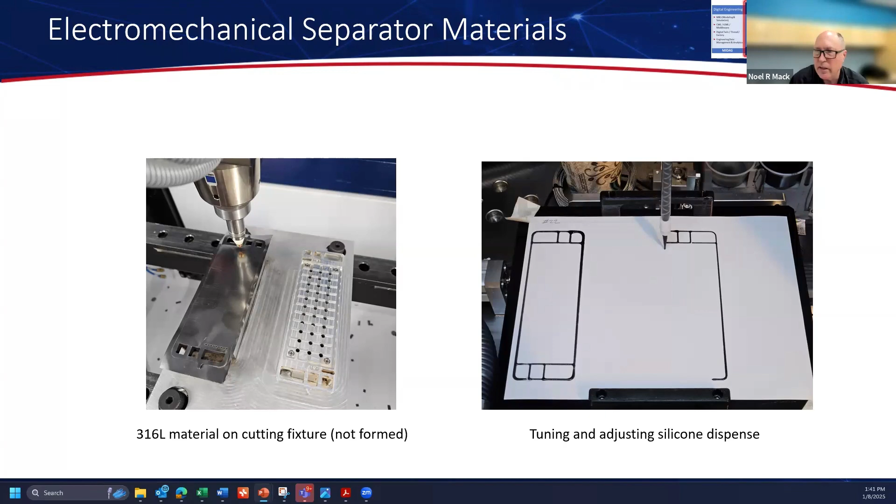So that's graphitically coated 316, and then the silicone seal.

So here's looking at the manufacturing line design. In the digital space, we're looking at the value stream mapping and then the production layout, and then running that production layout in the process simulate software, actually simulating that entire cell so we can do the production calculations in the virtual space before procuring equipment. We're doing metal forming, inspection, cutting, welding, robotic application of the sealant, curing the sealant in the oven, and then end-of-line testing.

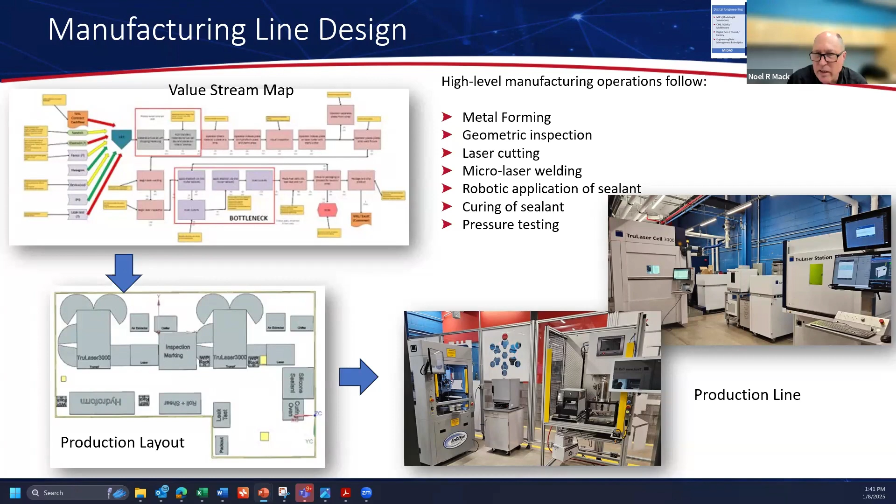Here you see a picture of the Interlaken press, and the radii are as tight as 0.1 millimeters in this case. So it's really important that we get the forming right to know we have the performance characteristics we need. This is the 1,000-ton Interlaken press sitting just adjacent to the cell seen in the prior slide. The graphic on the right has been shaded out so sensitive information is removed, but essentially what would be hidden behind those two red circles are some of the tight tolerances we need to hold through this process.

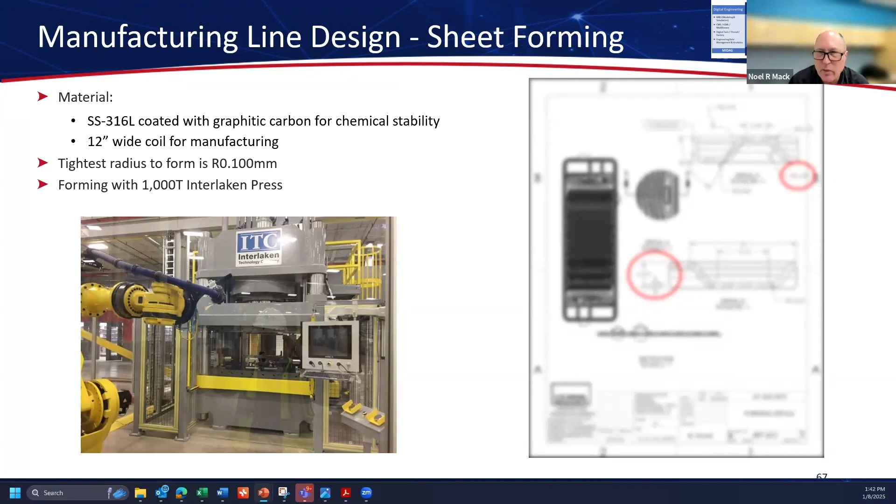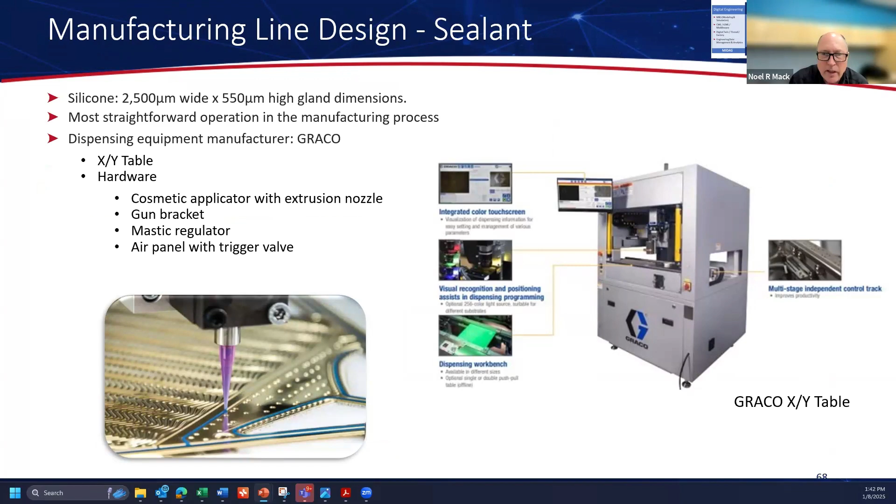Here's just looking at the silicone bead going down with an XY table, really using a cosmetic applicator with an extrusion nozzle, a mastic regulator, and a trigger valve to actuate it.

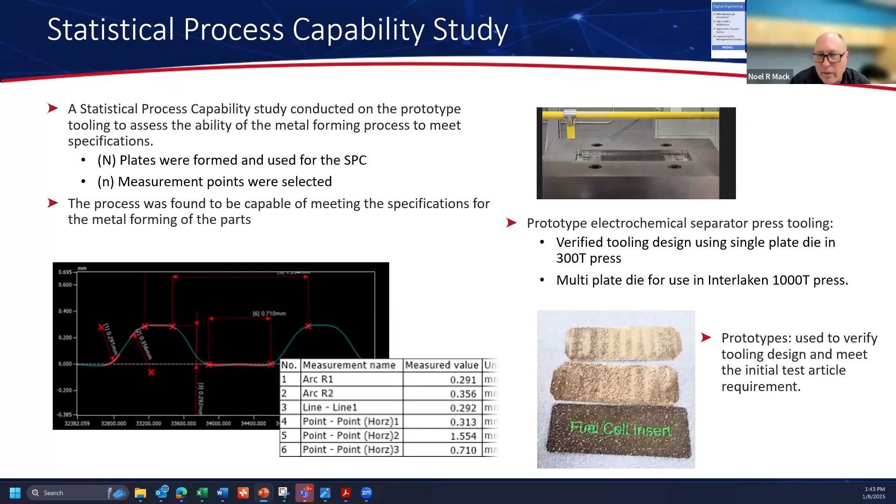On the VNV side, we've done the relevant SPC studies to know that we can form plates, not just one, not just a couple hundred, but get to full production rate. So we ran a number of plates through the system, did the appropriate measurements, and tuned the forming simulation and forming parameters to match the simulation and get to the capabilities we need.

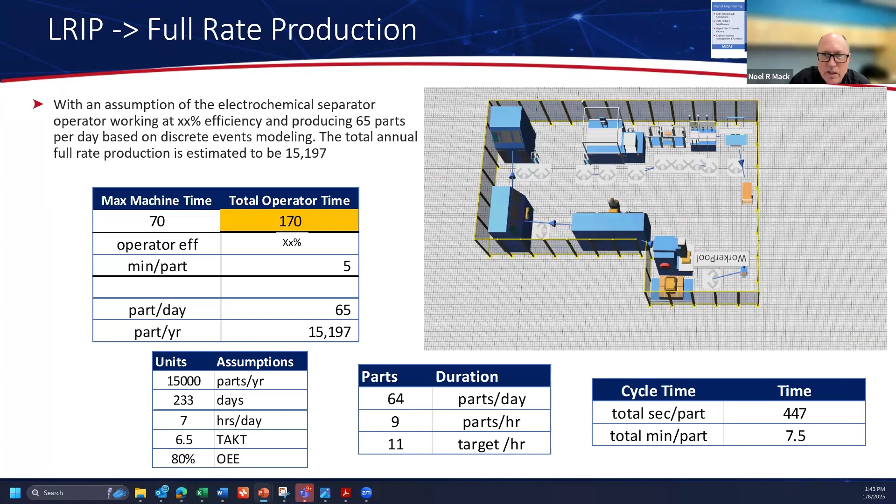Final slide here is looking at the actual cell. This is the process simulate running. You can see the worker running around the cell, moving from one piece of equipment to the next, finishing one process and running it over. This is where we would do our calculations to understand the operating efficiency, parts per hour, parts per day, and do the upfront calculations so that before we bought the equipment, we knew it would actually be fit for purpose.

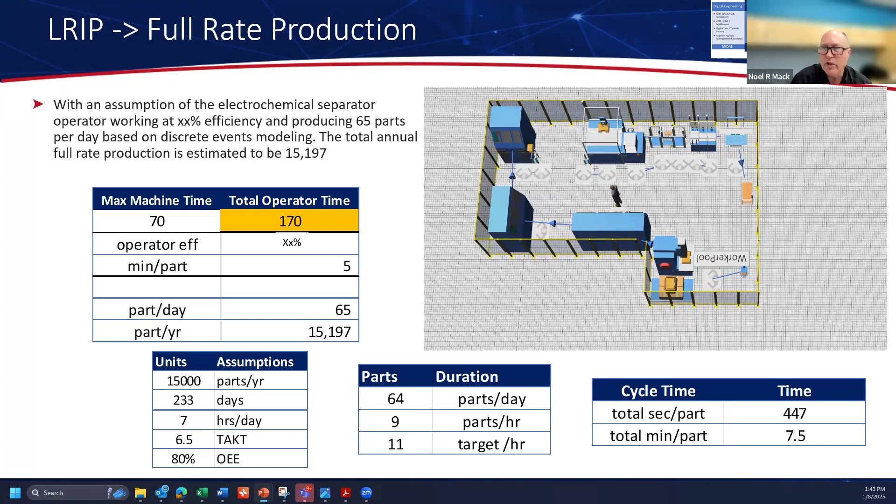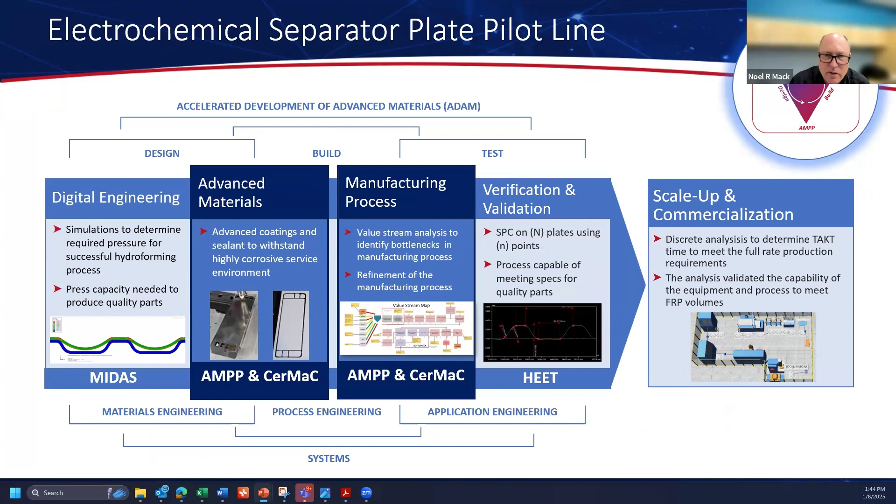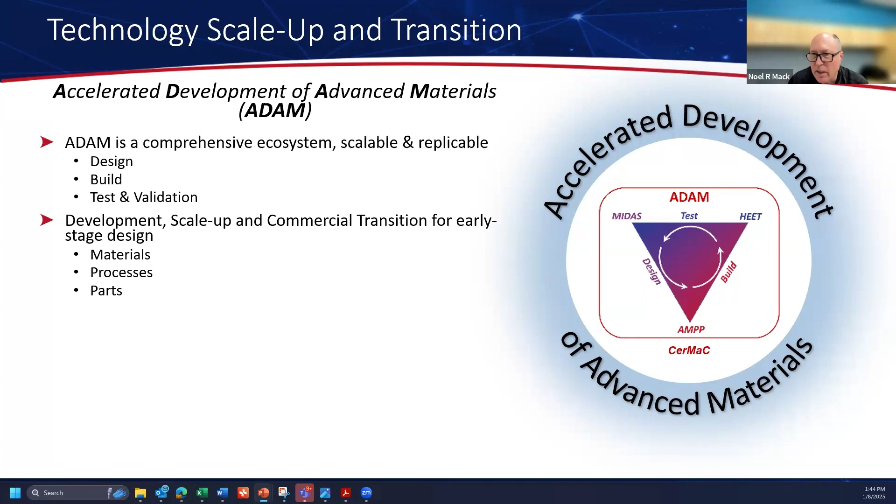Finally, in conclusion, all of this pulls together what we call ADAM, or Accelerated Development of Advanced Materials, the philosophy we're adopting. It's really a comprehensive ecosystem, scalable and replicable. We're looking at the development.

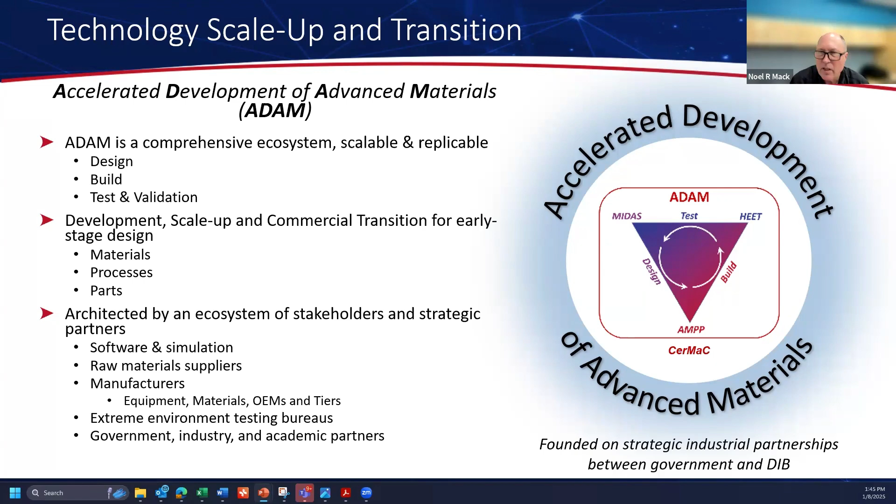Our focus is really on the development, scale up, and commercial transition of novel materials, processes, and parts. ADAM is not being built in a vacuum. It's being built with insight and collaboration with our government, industry, and academic partners up and down the value chain. So finally, if you want to know more, contact myself or Christine Longroy, our Senior Director of Ecosystem, who helps us keep all of the plates spinning in the system. So that's enough of me talking, and I'll hand over and open to questions.

Thanks so much, Noel. There's so much there, and I have so many questions. But I want to start by saying you talked at the beginning of the slide about the fact that you have 300 partners. Could you just spend a minute talking to our folks about how they can become partners with LIFT, and do they just talk to Christine? Could you elaborate a little?

So I'd like to say just talk to Christine, but the company is a lot bigger than just Christine and I. We're roughly 60 people in total, roughly 30 people in the tech team. As an entry point, yes, get a hold of Christine. How we work across the ecosystem, essentially, as I said earlier, we're here to accelerate technologies, not to incubate, but to accelerate.

These technologies often reside in small and mid-sized companies and need to be accelerated into sometimes the larger industrial companies. If we look at our member structure, the very top tier, our platinum tier, that's the big players — Siemens, Kearney, Hexagon. As we come down, we've got the next tier, our gold members, typically the bigger players, the Primes — Lockheed, Raytheon, Northrop Grumman. We've got the silvers, typically in the tiered supply space. And then the entry tier, which is often the mom and pop shop.